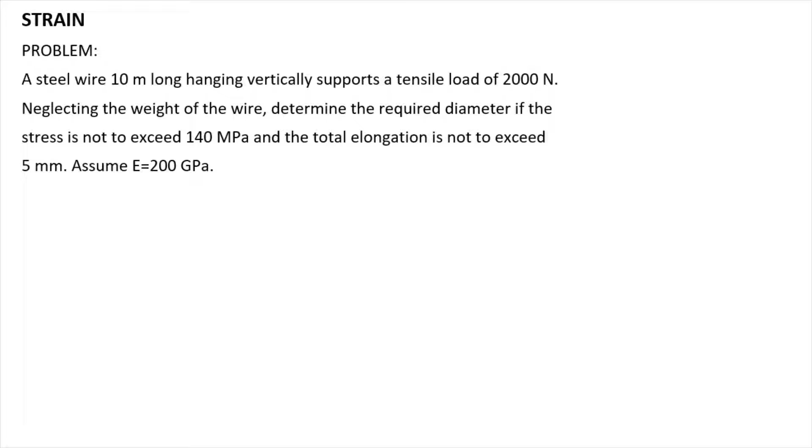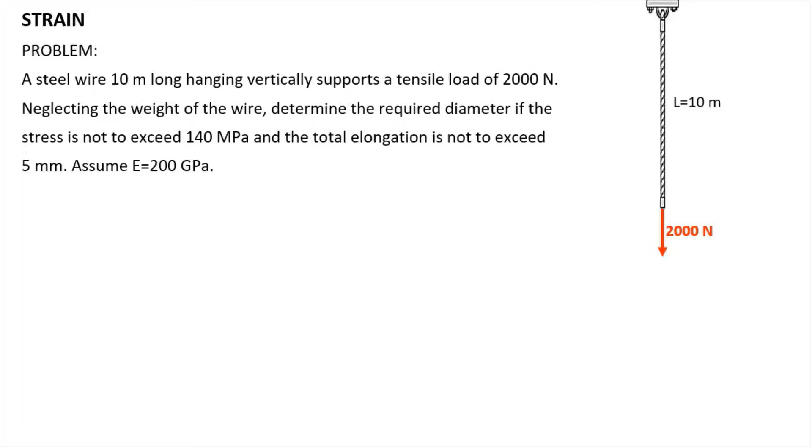So here's our illustration. We have a wire hanging vertically. It is 10 meters long, and it supports a load of 2,000 newtons. We're about to solve the required diameter for the wire. So may condition tayo: it's not to exceed 140 megapascal na stress and not to exceed yung 5 millimeters na elongation. So formula natin for stress is stress equals P over A.

The stress is equal to 140 megapascal and the force P is 2000 newtons. We're about to solve for the diameter. The wire's area is given by pi d squared over 4. So using your calculator, solve natin si D. D is equal to 4.264872372 millimeters, or round off natin into 4.26 millimeters. So tanong, yan na ba yung sagot? Hindi pa. Meron pang isa tayong limiting condition.

We're about to solve the diameter if the elongation should not exceed 5 millimeters. So formula natin for elongation: deformation equals PL over EA. Salpak na natin yung mga values. For the deformation, it is 5 millimeters. P is 2000 newtons. Our L is 10 meters. E is 200 gigapascal. And our area would be written as pi d squared over 4.

So lagay natin yung mga units. Yung 10 meters, convert natin into millimeters, times natin by 1,000. And yung gigapascal, convert natin into megapascal, multiply natin by 1,000. So our units are abiding now since megapascal is in newtons per millimeter squared. So ang makukuha natin na value ni D, ang unit niya is in millimeters. Solve natin si D. It is equal to 5.046265044 millimeters, or round off natin into 5.05 millimeters.

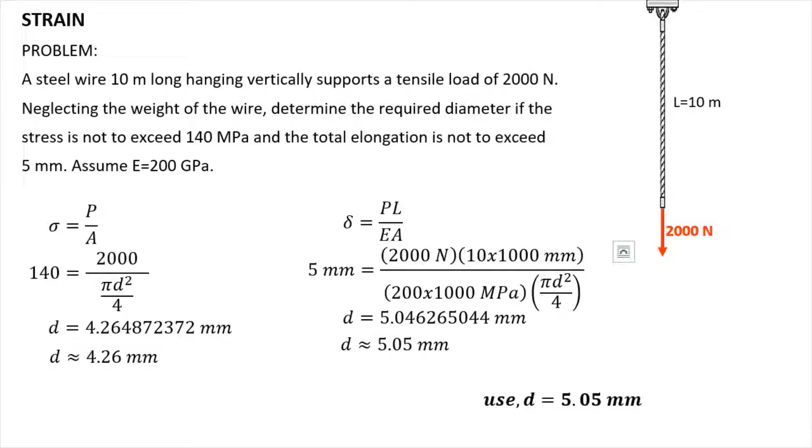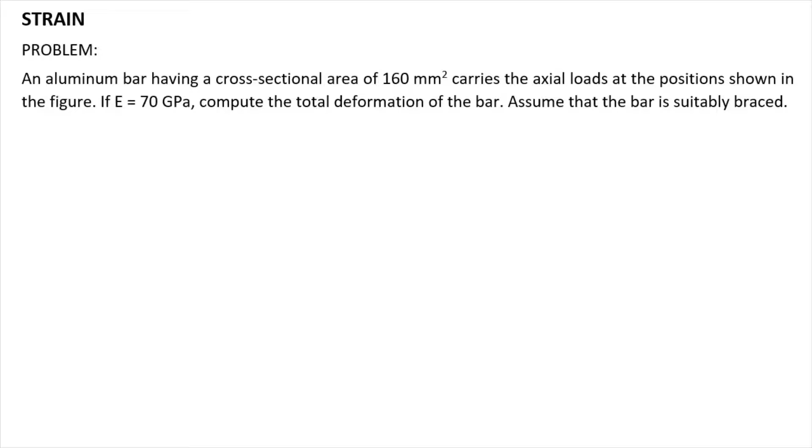So for this problem, let me read it. An aluminum bar having a cross-sectional area of 160 millimeters squared carries the axial loads at the positions shown in the figure. If E equals 70 gigapascal, compute the total deformation of the bar. Since the bar has several loads and different lengths, in each segment the deformations are different. So formula natin for deformation, it's PL over EA.

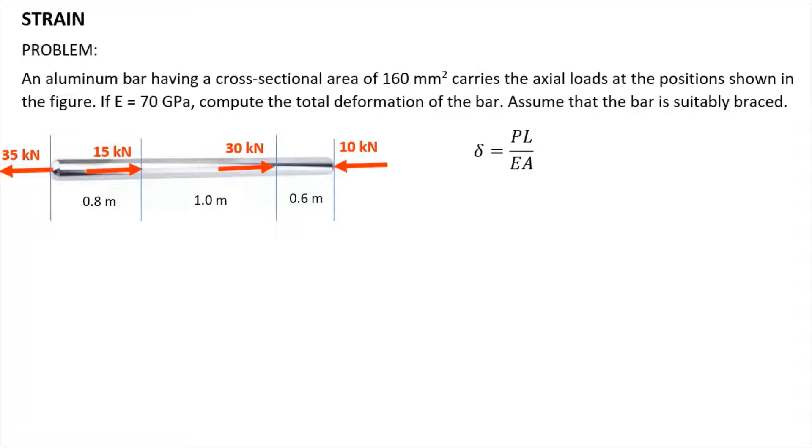In each segment, different axial forces ang nag-act dyan and different yung mga length nila, pero given na: 0.8, 1.0, and 0.6 meters. For E, given na rin, it's 70 gigapascal, and for area, it's also given, 160 millimeters squared. So isosolve na lang natin dito ay kung ano yung mga internal forces na nag-act in each segment. We are going to use an axial force diagram. Again, take note that tension is positive and compression is negative. So mag-start tayo sa left portion.

So we have here first the 35 kN. So it's tension, so ilagay natin above. So again, 0.8 meters from the left portion, may nag-act na 15 kN load. It is compression, so therefore minus, i-deduct natin yan sa previous load na nag-act, which is yung 35 kN. So 35 minus 15, that would result into 20 kilonewtons. So positive pa rin yun, so nasa taas pa rin siya.

And then next, merong 30 kN na nag-act here. So that's compression. So negative yan. I-minus natin yan from our previous axial force. So it's 20 minus 30. So that would result into negative 10 kilonewtons. So it's negative now. So therefore nasa baba na siya.

So ngayon nakuha na natin yung mga axial forces acting in each segment. So isalpak na lang natin yan sa ating formula. And i-denote natin from starting sa left as segment 1 and then susunod segment 2 and segment 3. So first, consider natin yung segment 1. So considering segment 1, denote natin yung deformation dyan as deformation sub 1.

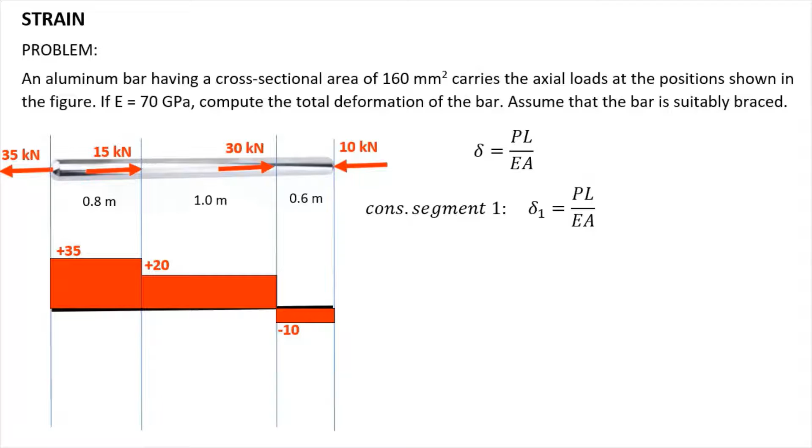So P natin, internal force acting at segment 1, it's 35 kN na tensile force. So isalpak natin yung 35 kN. And likewise, i-convert na rin natin siya into Newton. So, times natin by 1,000. So, 35,000 na siya, and ang unit niya na is Newtons. And then for L, it's 0.8 meters. I-convert na rin natin into millimeters. So, times natin by 1,000, that would be 800 millimeters.

And for E, it's 70 gigapascal. Convert na natin into megapascal. Times natin by 1,000. So, that would be 70,000 megapascal. And for the area, given na yun, it's 160 millimeters squared. So now using your calculator, solve natin yung deformation sa segment 1. It's 2.5 millimeters. So next naman, consider natin ngayon yung segment 2.

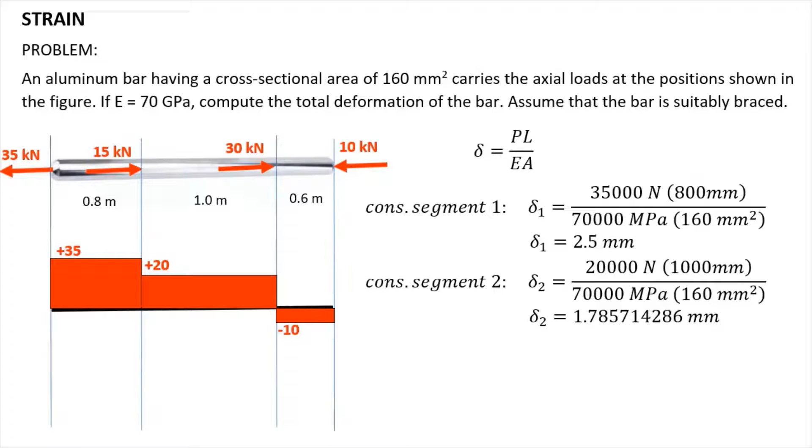So i-denote natin yun as deformation sub 2. So the force acting at segment 2 is 20 kilonewtons. So change lang natin to. And then, the length is 1 meter. So, itong 800 gawin natin 1,000 millimeters. And then, E is 70 gigapascal, so as is, and then the area is also 160 millimeters squared. So now, solve for the deformation at segment 2. It's 1.785714286 millimeters. So ngayon, proceed na tayo for solving the deformation at segment 3.

Okay, so the axial force acting at segment 3 is negative 10 kilonewtons. The negative sign indicates compression. And take note of this, this is very important. Ang tensile force is positive, and pag positive, it means that the deformation is elongation. And kapag compressive force, it is negative, and the deformation is shortening. Umiiksi, kasi nako-compress. So for this one, isama na natin yung sign na negative.

And the length is 0.6 meters or in terms of millimeters, that's 600 millimeters. So same na yung E and A niya. So solve natin ang deformation sa segment 3. So negative yung lalabas na answer dyan, meaning to say it's shortening or umiiksi. So it's negative 0.5357142857 millimeters.

So ngayon, ang pinapahanap sa problem is compute the total deformation of the bar. So therefore, we will just sum up our deformation. So total deformation is equal to the deformation of segment 1 plus the deformation of segment 2 plus the deformation of segment 3. So copy lang natin itong mga ito. So 2.5 plus, ito din, copy natin. Okay, wait. And then lastly, copy natin to.

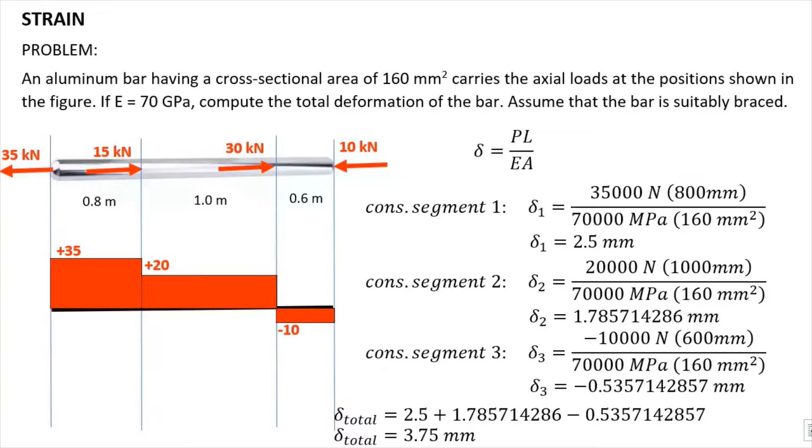So consider natin yung sign niya. For deformation 1 and for deformation 2, nag-elongate. Yung deformation ng third segment, nag-shorten. So, using your calculators, solve. So, the total deformation is 3.75 millimeters. So, yan na yung final answer, and sakto yan na mapapalabas ng calculators.